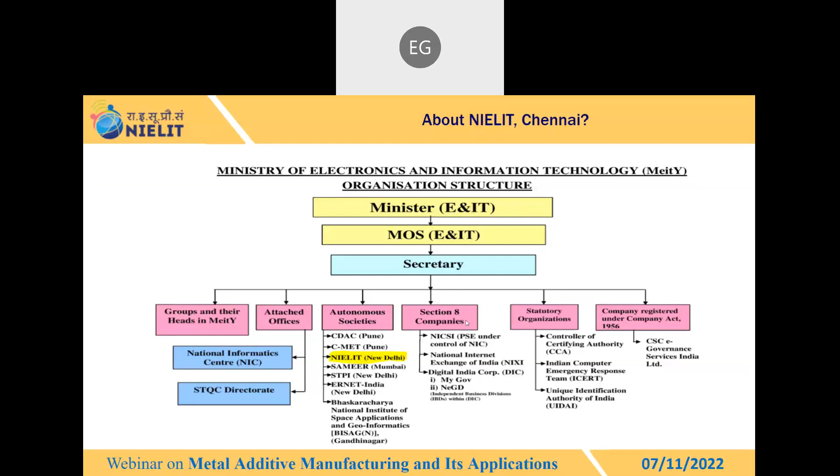In our NIELIT Chennai, these are some important thrust areas. One of the important ones is 3D printing and additive manufacturing. Apart from this, we have some more areas like information security, cloud computing, data science, and embedded systems. These are some important thrust areas in NIELIT Chennai.

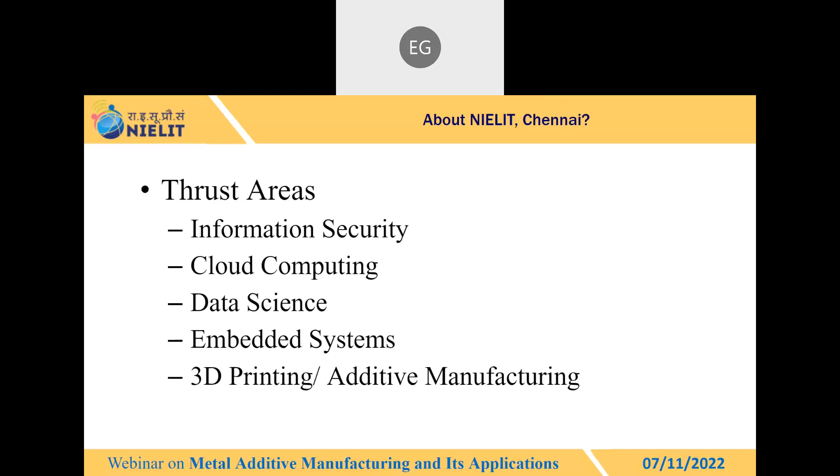Activities in our NIELIT Chennai: we are conducting different training programs, like under the Future Skills Prime project, different government official training programs such as webinars, and also seminars for students. We conduct different training programs in online and offline mode.

We are conducting capacity building projects funded by Ministry of Information Security, ESDM and EPDPT, and FutureSkills Prime. We handle different projects in different areas, and the total number of candidates trained is 30,000. As I mentioned, we conduct different courses and training programs, and we have certified more than 30,000 candidates in different areas.

Also, on a monthly basis we conduct DLC examinations, in which we have certified more than 25,000 candidates. So these are some important activities mentioned in the slide.

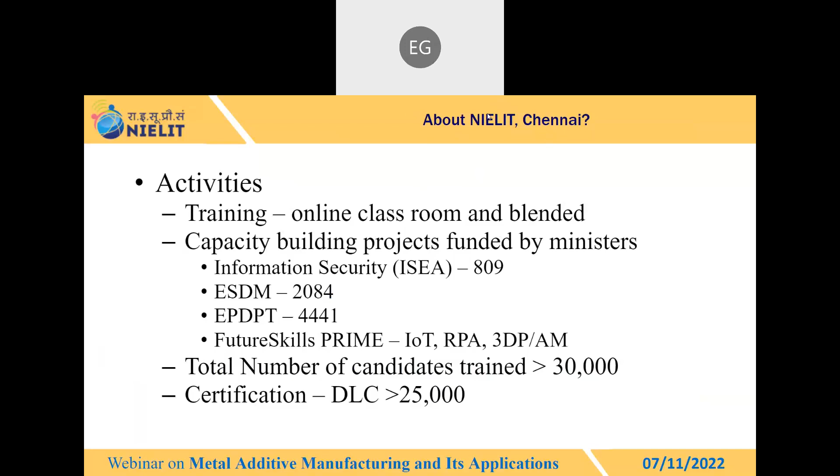If you want more information about our NIELIT Chennai, you can check our NIELIT Chennai website portal. Regarding courses and course prospectus, all details will be updated on our NIELIT Chennai portal, so you can check it there to get more information.

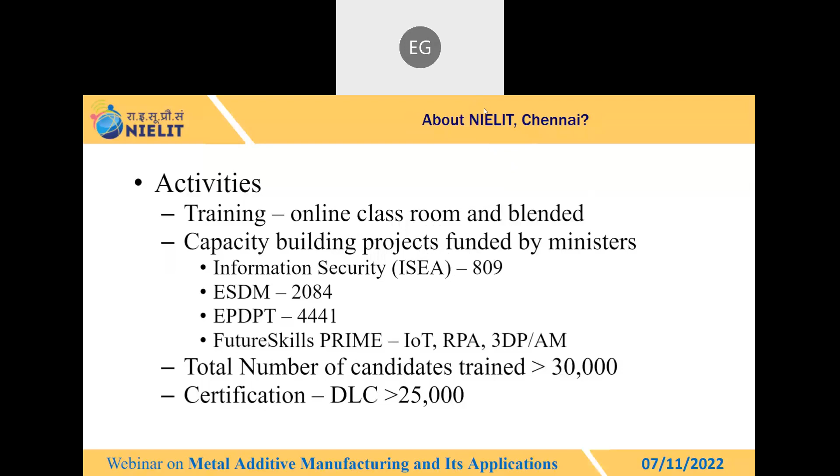Okay, so up to now we have discussed some basic information about NIELIT Chennai. I think some of the candidates already know about our NIELIT Chennai. So now we will start our main topic in today's webinar: metal additive manufacturing and its application.

Before we move on to metal additive manufacturing, we will discuss what is meant by additive manufacturing. It is a process of joining materials to make objects from 3D CAD data, usually layer upon layer, as opposed to subtractive manufacturing methodology. In this 3D printing process, the object is created layer by layer from the CAD data file, so this is called 3D printing.

Actually there are different names for this. Some people call it 3D printing, some call it additive manufacturing process, some call it rapid prototyping. So what does that mean? All these names refer to the same thing. There is no difference.

Initially this additive manufacturing process was developed for making prototypes. That is the reason it is called rapid prototyping.

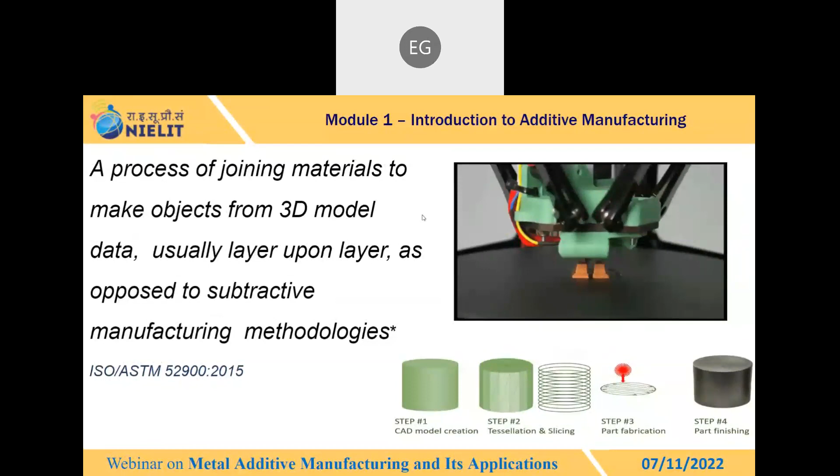3D printing means the process is very simple. From the CAD data, it creates a 3D object in a layer by layer process. Here there is no metal removal process, and there is no requirement for any tool holding and work holding devices. So the wastage of material is very less. These are some advantages and important points compared to conventional manufacturing processes. This is a simple concept about 3D printing.

Next is additive manufacturing evolution - how 3D printing has evolved. Hope all of you know, 3D printing first started as a technology in the 1980s.

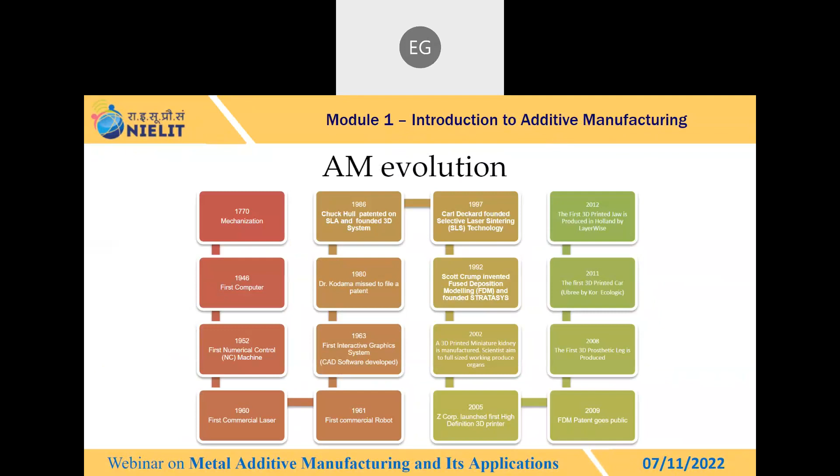The first developed technology is SLA, stereolithography. As I already informed, there are different types of 3D printing technology. One very important and widely used technology is called SLA. This SLA technology is the first developed 3D printing technology. The person's name is Chuck Hull, he is from 3D Systems.

In 1986, SLA technology was developed and patented. You can see in 1986, and after that SLS, FDM, CJP and many other technologies developed. But the first developed technology is SLA technology, 1986, from 3D Systems.

You can check some more information - actually the first mechanization started in 1770 and the first computer was developed in 1946. There are different points in this evolution timeline you can go through. But our important point is that the first developed technology, SLA, in 1986, is from Chuck Hull of 3D Systems.

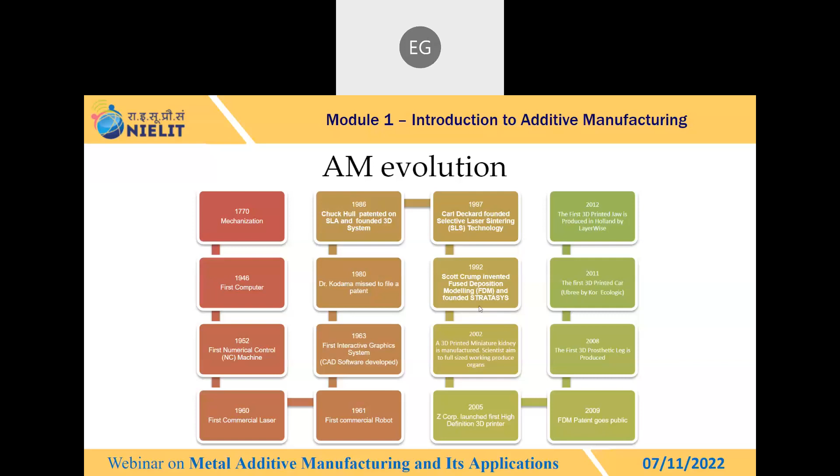After that, you can see FDM technology - it was developed in 1992. So these two points are very important now.

Next is the difference between additive manufacturing and conventional manufacturing process. Why do we need to go with additive manufacturing compared to conventional manufacturing? That is a very important thing.

Nowadays there are different manufacturing processes. Suppose I want to make one mechanical part, for example a gear. I can make this gear using different manufacturing processes. If going with conventional manufacturing, I can make a gear using a lathe, milling machine, shaping machine - there are different machineries. If going with metal forming process, I can also make the gear. And with casting also, I can make the gear.

So why do we need to come with 3D printing process? What is the advantage? What is the uniqueness in this additive manufacturing process comparatively to conventional machining? I mentioned some important points. Additive manufacturing has a close relationship with the conventional machining process.

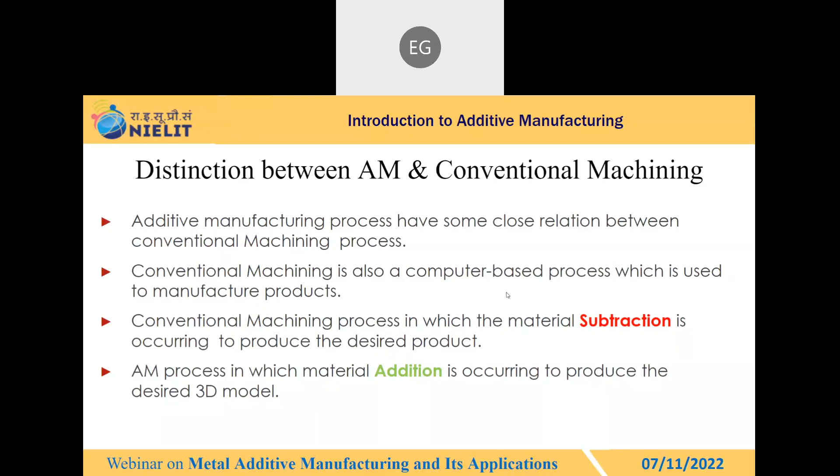Already I mentioned the gear example. Suppose I want to make that gear part. In the conventional manufacturing process, we need to involve different operations, like drilling, milling machine, then grinding, and if required, polishing. These are all lengthy processes involving different operations, which means the part manufacturing lead time will take more.

Comparatively, in the additive manufacturing process it is not like that. Here in additive manufacturing, easily you can make your object without any work holding device or tool holding device, or without any highly skilled manpower or complex programmed part. It is not required. Easily you can make your object using 3D printing technology.

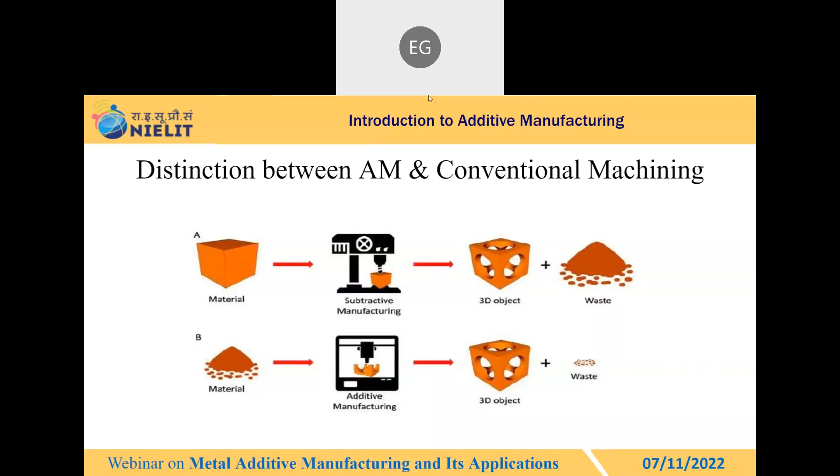In conventional manufacturing, we need different tool holding and work holding devices for making different objects. Suppose I'm machining an impeller, and next I want to load a gear part - we need a different work holding device. Each part needs different work holding and tool holding devices. But in 3D printing, there is no need for any work holding or tool holding device.

Another important point is that in 3D printing there's no need for highly skilled labor. Even if you're working with metal, maybe a medium-level skilled operator is required, but if you're working with polymer, there's no need for highly skilled labor. And the programming is also very easy compared to CNC programming - here programming is done automatically by software. So there's no need for highly skilled labor, and the programming is very simple.

Wastage is very less in 3D printing, and reduced wastage automatically means reduced product cost. Product cost as well as product lead time will also be reduced. Reduced product lead time means automatically your production will increase. These are the advantages, the main important points compared to the conventional manufacturing process.

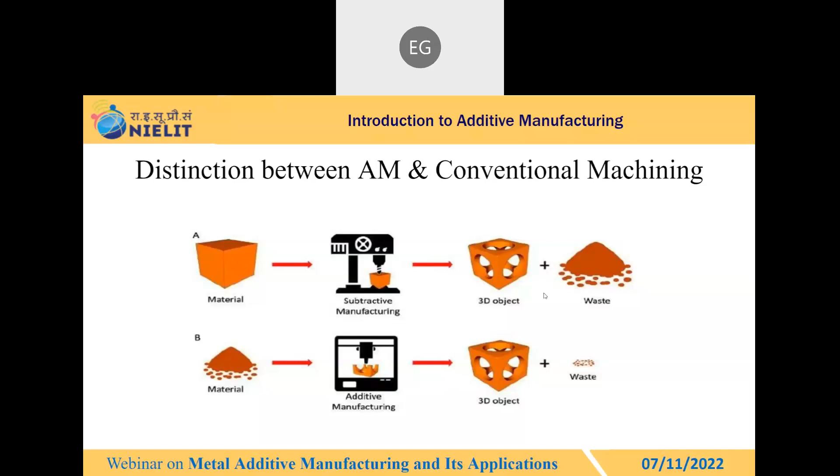These are some classifications of additive manufacturing technology under ASTM - America's Standard Testing Material. Under this, 3D printing technologies are classified into 7 types: material extrusion, vat polymerization, sheet lamination, powder bed fusion, binder jetting, material jetting, and DED - direct energy deposition. These are the 7 different 3D printing technologies under ASTM.

In the last webinar, we discussed some polymer related 3D printing technologies like material extrusion, vat polymerization, sheet lamination, binder jetting, and even SLS. So if anybody missed that, let me know and I will share the recorded video link so you can watch it. But now we will mainly discuss metal additive manufacturing technology like DED, DMLS, EBM, and SLM. These three or four metal additive manufacturing technologies are what we'll mainly discuss in today's webinar, for the next 10 to 20 minutes.

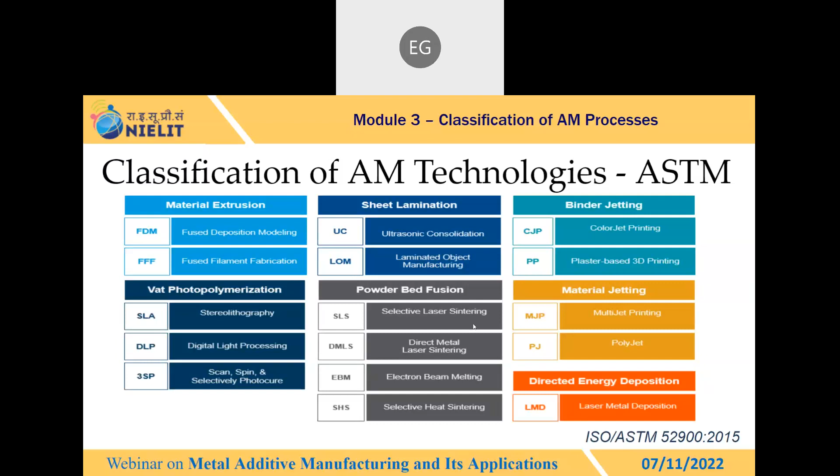So these are some classifications under ASTM. You can see each technology. I think we already discussed these things, so I will not discuss more about this in this webinar. I will just explain some basic definitions.

In vat polymerization, it is a liquid based technology. Using a laser source or a light source like UV light, you cure the liquid material to get the 3D object. This technology is widely used for automobile and aerospace applications, and with this technology you can get more accurate parts.

And material jetting, meaning MJP technology or PolyJet technology, is very fine and accurate for precision parts. Usually you 3D print with this technology. In this technology, the part material and support material will be different. Part material will be like PP material, nylon material, or wax material, while support material is typically wax.

For example, take the 3D Systems machine MJP 2500 or 3500. In this machine, the part material is like nylon, PP, or some kind of rigid material, and the support material is an industrial grade wax. Once your part is completed, you can easily post-process it.

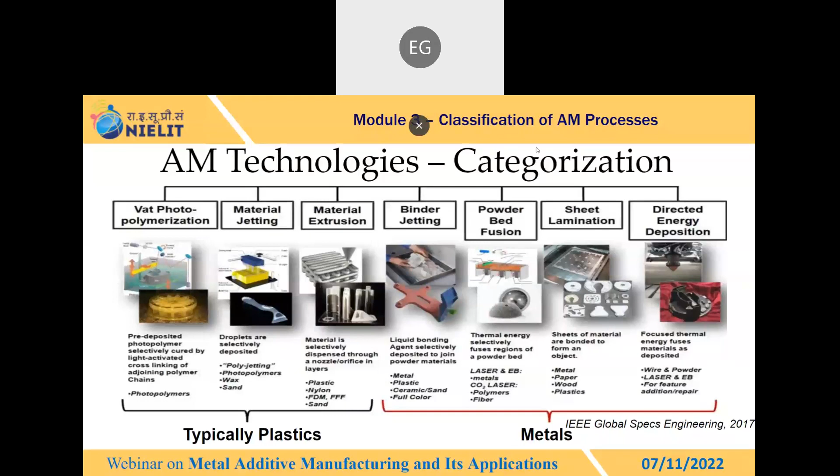And DED, direct energy deposition - this is one of the metal 3D printing technologies. In this technology, the metal wire is melted and deposited layer by layer, and you get the 3D object. This is some classification.

Some of you already know very well about this technology, so I will not give more information about it because we already discussed it in a previous webinar. Now I will directly go into the metal process.

In metal additive manufacturing process, they normally classify into two sections: one is powder bed fusion, another is the DED process. Actually in metal 3D printing technology, there are two different types classified - powder bed fusion and DED process. In powder bed fusion, the input material is in powder format, while in DED, direct energy deposition process, the input material is in wire format - meaning the material is converted into wire format.

The wire will be melted and deposited in a layer by layer process, and then you get the object. It is a DED process, almost similar to FDM. We will discuss some more detail on DED and powder bed fusion.

Why do we classify these as two different technologies? Actually, in the DED process it is a low cost metal 3D printing process. Easily you can test any material, and easily you can make your object. But the problem is you cannot get more accuracy of the part and you cannot get a better surface finish, because it is a process similar to FDM.

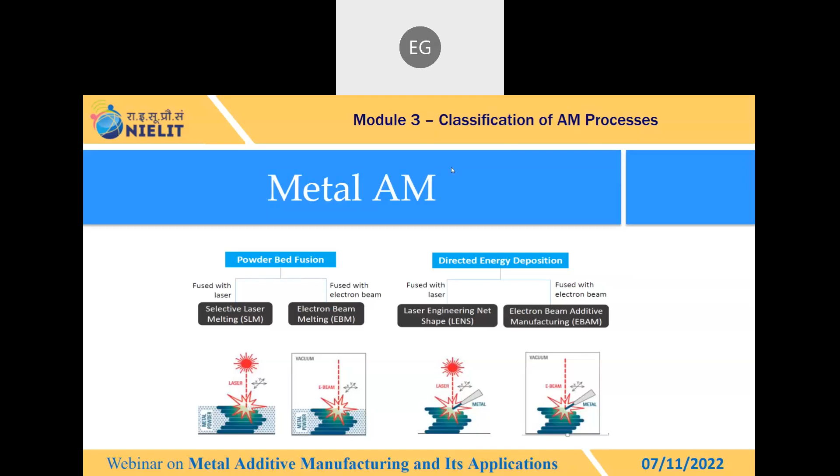First we will discuss powder bed fusion. Normally, in plastic, we use different materials like nylon, PP material, PLA, ABS, glass filled nylon, fiber based materials, Pro HD, and PETG.

Like that, we use different polymer based materials in plastic 3D printing. We use different technologies in plastic polymer based printing such as MJP, SLA, FDM, CJP. So there are different polymer 3D printing technologies, and also different polymer materials.

But in metal, you can see only some kind of limited materials are available that you can directly 3D print. Suppose I developed a new material - that material may work or may not work in the 3D printing process. So that is a limitation in 3D printing.

In metal 3D printing or plastic 3D printing, only limited materials are available based on the technology. So you can select the material only based on what technology you use. Suppose in DMLS, you can only print cobalt chromium, stainless steel, and tool steel - these are some standardized materials you can print. Similarly, each technology has some limitations in 3D printing.

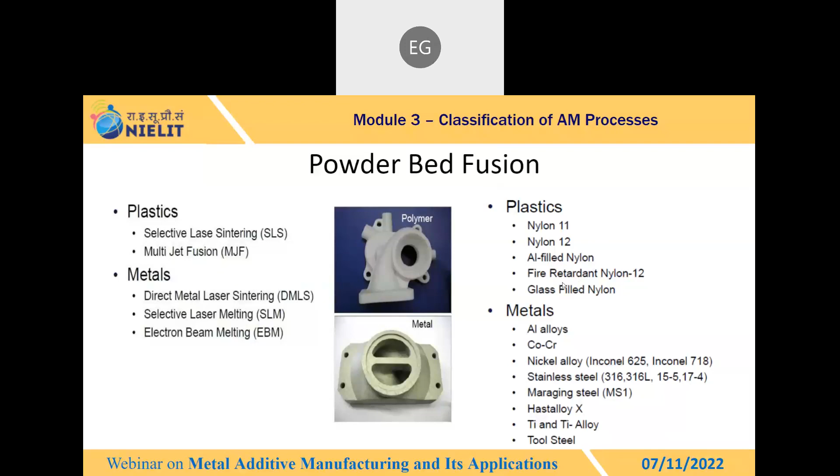So this is the list of some materials used in the metal additive manufacturing process.

The next topic is the binding mechanism, which is very important. As I previously mentioned, in the metal additive manufacturing process, particularly in DMLS direct metal laser sintering process, the input material used is in powder format. The metal material is converted into powder format, and into that powder we pass a laser source.

Wherever we pass the laser, that area gets solidified due to a chemical reaction between the laser source and the material. This binding mechanism can happen through different processes. You can see here the primary binding mechanisms in the powder bed process, classified into four types: solid state sintering, chemically induced binding, liquid phase sintering, and full melting.

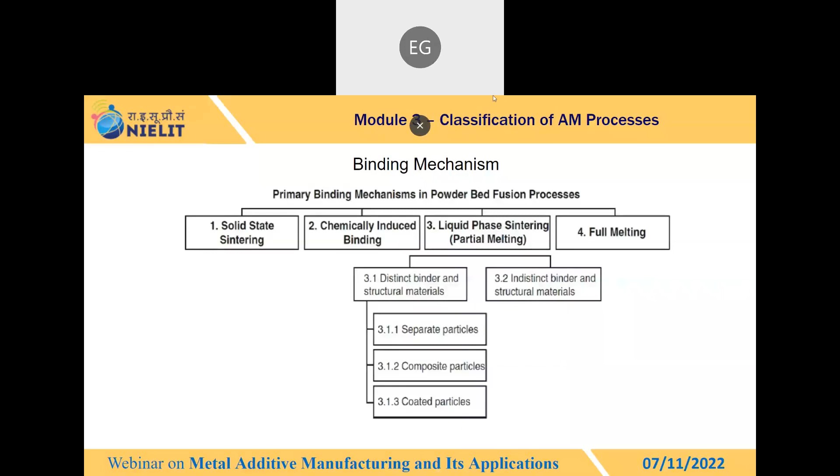These are some binding mechanisms commonly used in metal 3D printing. You can see liquid phase sintering and partial melting here. Full melting does not happen in this process; it is partial melting, which is called liquid phase sintering.

This liquid phase sintering is classified into two types: one is distinct binder and structural material, and another is indistinct binder and structural material. These are two different partial melting processes in the powder bed fusion process.

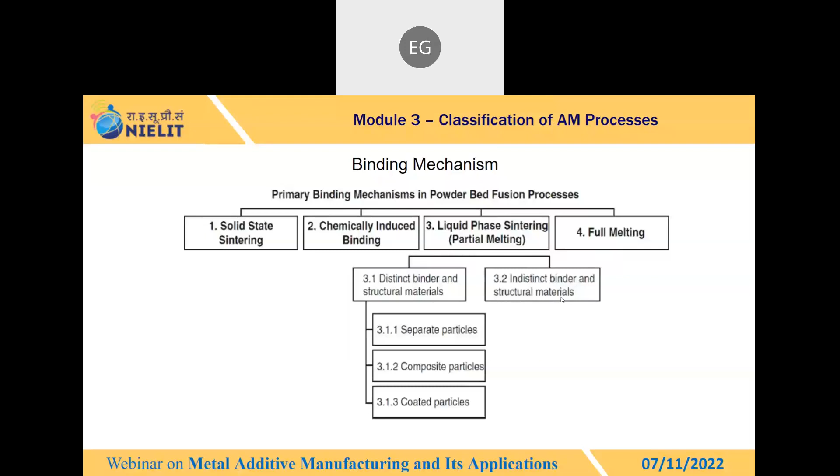There are different particles involved: separate particles, composite particles, and coated particles under the distinct binder and structural material category. These are some basic information about binding mechanisms, so I will not discuss this more. You can go through these things yourself.

Next, what are the important key factors involved in metal additive manufacturing technology? The metal additive manufacturing process is not similar to polymer processes; the process itself will be different.

For example, take SLA technology. How does it work? Initially the material is in liquid format. We load it and pass the laser from the top. Wherever the laser passes, that area of material gets solidified due to a chemical reaction.

After the part is completed, you can directly take it out, clean the part, and use it. There is no requirement for more post-processing work in normal polymer 3D printing technology. But in metal additive manufacturing, it is not like that.

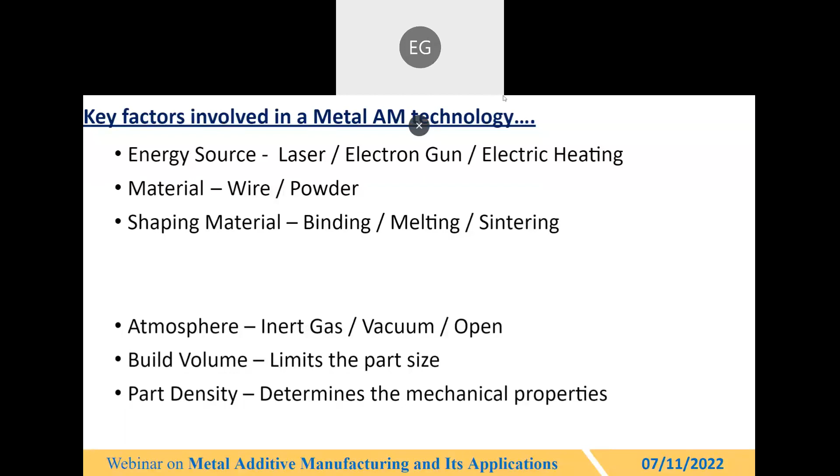Another one is part density, which determines the mechanical properties. It is purely based on your material - whatever material you use, based on that material only it will perform.

So the first one is electron beam melting. This technology uses material in titanium, cobalt chrome, nickel superalloy. Here the material format is powder format.

Here the material is not sintered - here our material will be melted. That is why it's called electron beam melting. The material will be melted, then the material will be solidified.

In this technology, the layer thickness minimum can be 50 micron, maximum 200 micron, and the electron beam spot size is 140 micron to 2.5 micron. The maximum build volume size is 250mm by 430mm. So this is the electron beam melting technology.

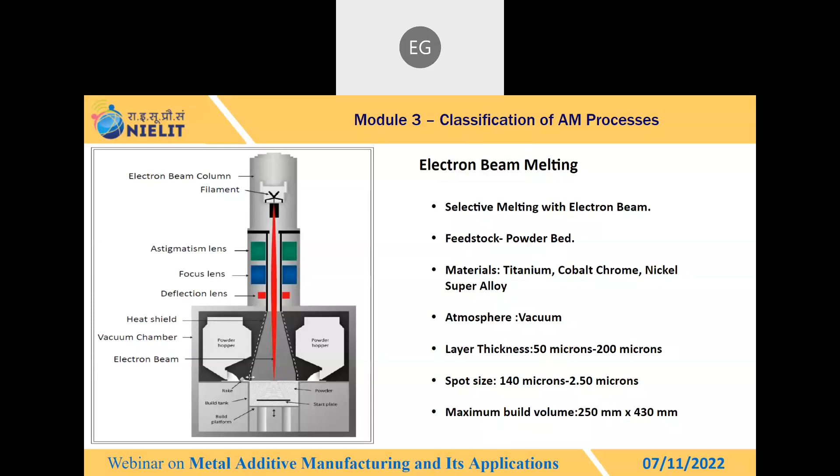Another one is the selective laser melting process. This is a widely used technology. Here the materials used are aluminum, titanium, tool steel, cobalt, chromium, nickel - these are the widely used materials in the selective laser melting process.

Compared to the electron beam melting process, here the layer thickness will be very less - you can print even 20 micron. But maximum build size available here is 500mm by 500mm, and the energy source used here is laser.

So what is the main difference between electron beam melting and selective laser melting? The main difference is that here a laser energy source is used, while in electron beam melting we use an electron beam source - that is the main difference related to energy.

Otherwise, the process remains the same. Here also the material is in the same powder format - whatever material, aluminum or titanium or nickel, the material will be converted into powder format and loaded into the build platform.

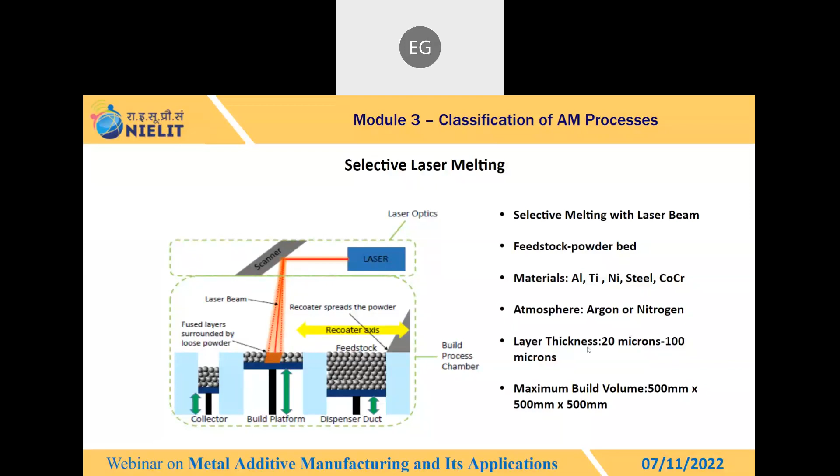EBM, electron beam melting, is similar to selective laser melting, but SLM is better because it can achieve precision down to 20 microns, since the laser spot size is very small. You can print more accurate and precise parts than with EBM. That's why most automobile and aerospace companies prefer direct metal laser sintering and selective laser melting over EBM, even though these processes cost more. SLM gives more accurate and precise parts than EBM because SLM starts from 20 microns while EBM starts only from 50 microns onward. That's why SLM is more widely used, though it is costlier than EBM.

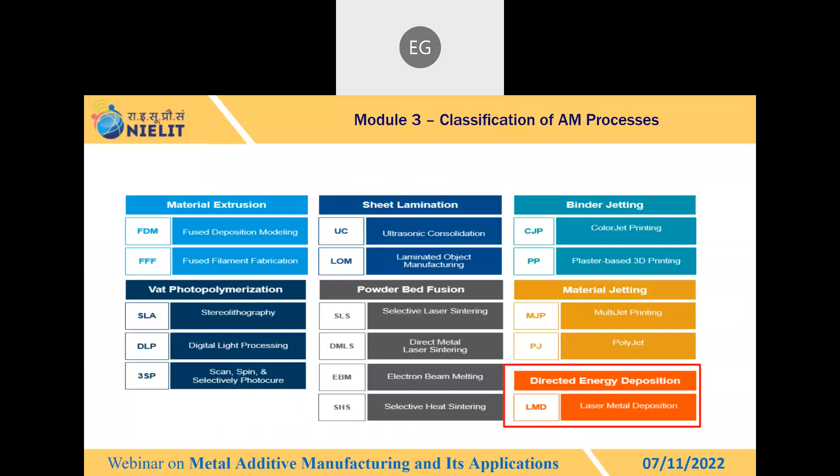The next process is DED, directed energy deposition.